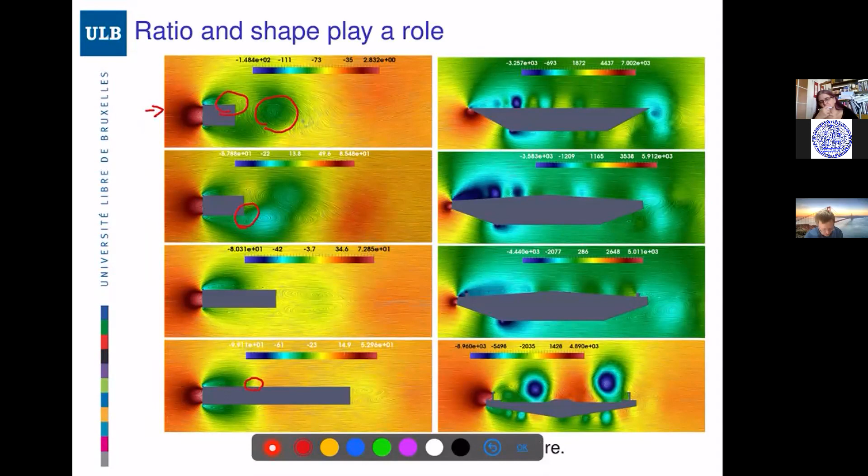Now, this is a CFD picture where you see a flow coming from the left and encountering an obstacle, and you see that at least two things count. The ratio: you see that the flow pattern here is quite different. If you have a long obstacle, then the vortices close before the end of the obstacle. So you have quite different patterns. So the ratio is important, and you also see that the shape is important.

This shape here is more like a realistic bridge. Of course, these are cross sections of bridges. If you have a wind guard here, this creates huge vortices, so this is not good for cars. But if you have a smaller obstacle on the plate or on the cross section, you create different flow patterns. So it's quite a difficult thing to study.

So I will totally simplify things, and my cross section will always be a rectangle. I'm not saying that I'm close to reality. I'm simplifying in order to be able to say something and study something from the mathematical point of view. Of course, engineers can do much more, but my point of view is mathematical. This is an experiment in a wind tunnel. You see that this is my simplified structure here.

So it's really a plate which is fixed on the two sides, right? And you have a flow coming from the left, a wind generated by the wind tunnel. And you see that you have many vortices created after the bridge, after the plate. So the obstacle, when the flow hits the obstacle, it generates a lot of vortices.

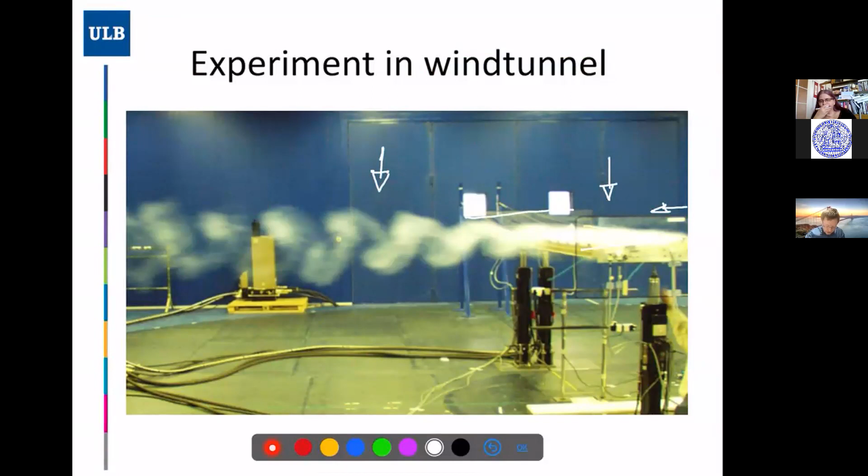So this is what is called vortex shedding, and I illustrated it like this. So in fact, this is a cylinder which can move only up and down, you have a wind coming from the left, and you see that this wind creates vortices, let's say, in a periodic way, and you see that it starts oscillation of the cylinder up and down.

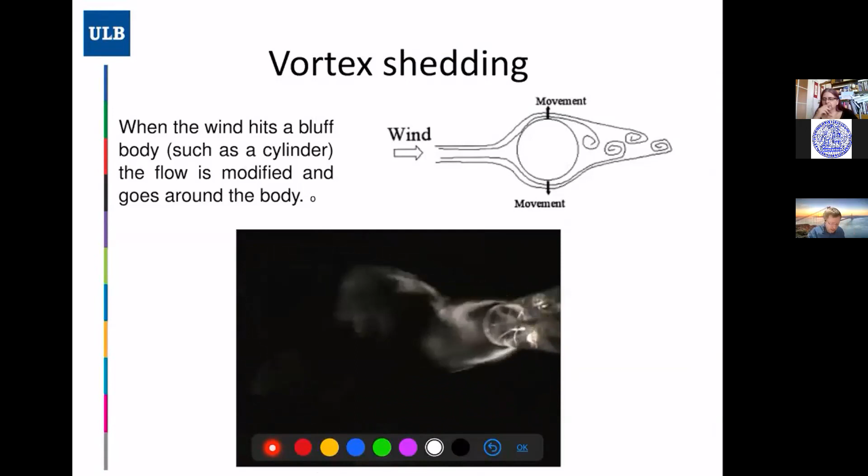So if I come back to this Tacoma bridge, remember that when the bridge collapsed, you had a strong up and down movement, and after some moment, the deck started to have torsion, and the torsion was a disaster that created the collapse. Now, what we suspect, and what is, I think, a good explanation of what happened, is that when you have a wind coming here, it will create up and down oscillation. So this is an excitation of the bridge by the wind.

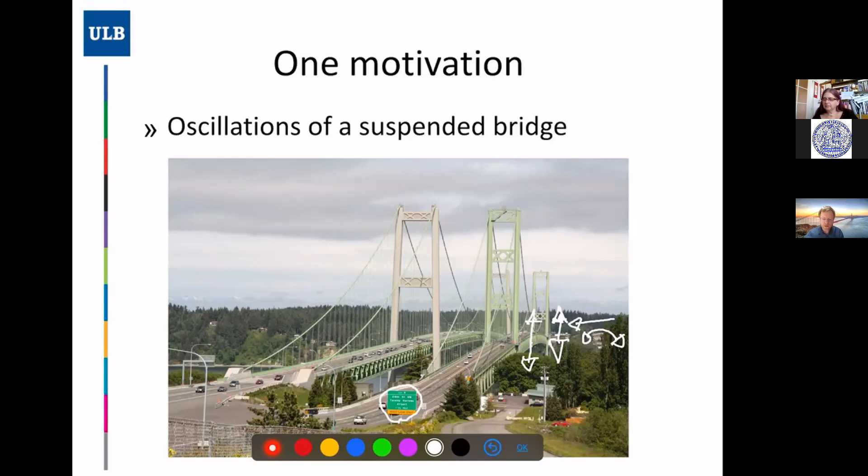And once you have energy entering the system, then you have several modes in the structure that can capture energy from up and down movement to torsional movement. And this torsion will be the devil, let's say, for the bridge. Okay.

So let me comment a little bit more on what is the mechanism that creates this up and down movement of the body in the vortex shedding phenomenon. This is again CFD, and you see that you have two shapes, and these shapes are symmetric. And in fact, let me just indicate that this is a picture with small Reynolds number. And you see that the pattern is totally symmetric.

So for the moment, forget about inflow, outflow. Of course, maybe it's not very physical. Maybe I have to go to an infinite cylinder and so on. But just assume that, okay, look at the symmetric. Of course, if the solution is totally symmetric, there is no lift. So lift is the force that the fluid would create to go like this, and there is no lift. Of course, there is drag. Drag is in this direction, but there is no lift.

Okay. Now, if you increase the Reynolds number, you see that you have a non-symmetric pattern. And assume again that I'm not discussing anything about the boundary condition, etc. So just do the reflection here and like this. If you have good conditions, no slip and good inflow outflow, let's say, you can flip the solution, and you will have another solution of your Navier-Stokes equation. Okay, so if there is non-symmetry, there is non-uniqueness.

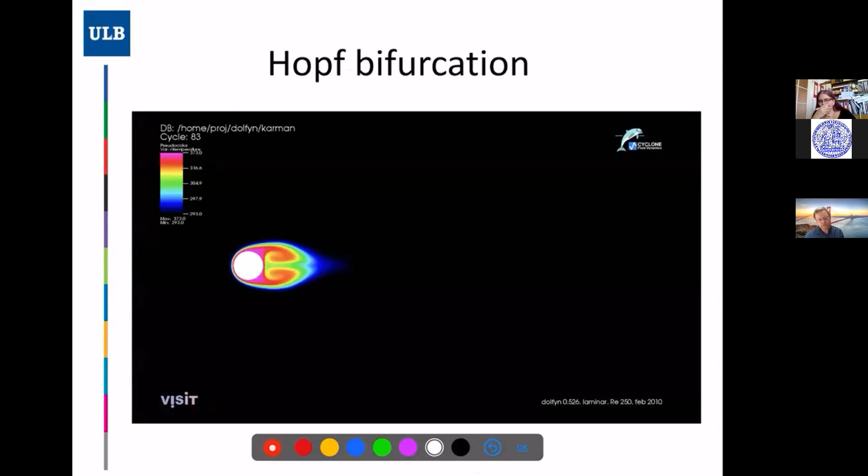And you have to be careful here, because numerically you can observe bifurcation, but what is interesting here is that there is a bifurcation which appears before the bifurcation of steady state to steady state, from symmetric state to non-symmetric state. And this is now a time-dependent solution. And in fact, when you see this time-dependent solution, you have the feeling that this solution is going to converge to a steady state. It seems like that.

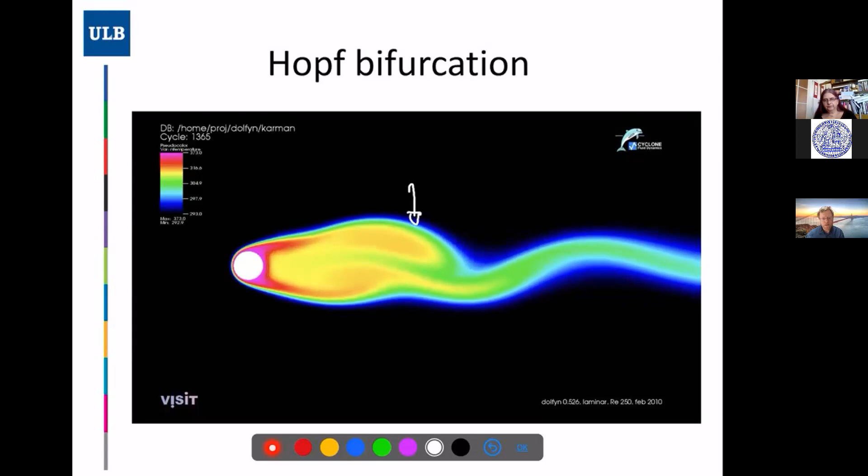And then you will see that at some moment, the solution will start to be non-symmetric. And maybe you have seen this kind of video before. So you see that the solution is not symmetric here. It becomes non-symmetric, and then it starts. And then you see that what is called a Karman vortex street is created.

And in fact, this is what is called a Hopf bifurcation, because you bifurcate from a steady state to a periodic state. And it's interesting that in 2D, when you look at a flow past a cylinder, the Hopf bifurcation appears before the bifurcation of steady states. And by the way, there is a marvelous paper by Paolo Galdi about the functional setting of this Hopf bifurcation. Okay, so what would be a dream?

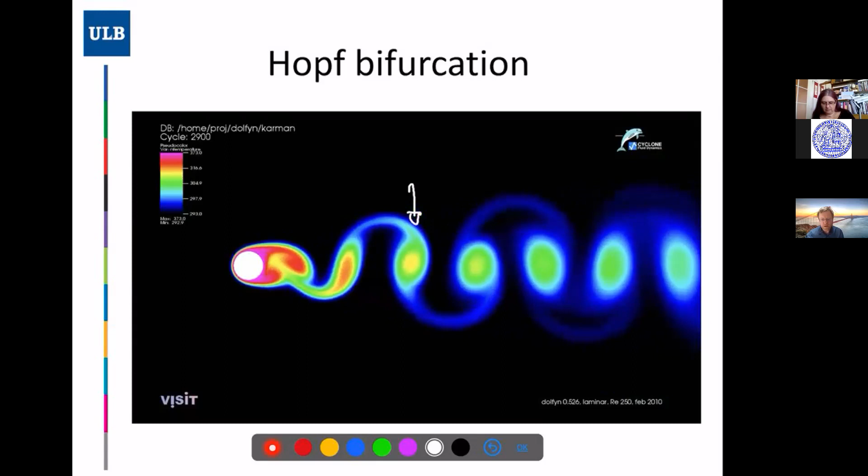A dream would be that we can show, or I would dream, excited by a wind, it starts to oscillate up and down, and periodic movement, maybe twist movement of the bridge, of the plate.

Okay, so let me discuss about modeling. Yeah. So in your previous graph, I always thinking about steady state, and you increase the Reynolds number. Yeah. Okay, and like when Reynolds number is small, you have symmetric solution. When the shape is symmetric, and when you increase the Reynolds number, then somehow it becomes non-symmetric. Yeah. Right? Okay. Thank you. Yeah, that's it.

Okay, so let me discuss the modeling. So there are at least 3 levels of modeling. One is to study the structure. And when you want to study the structure, somehow you assume how the aerodynamic forces act on the plate.

So, for instance, I will show you two ways to introduce aerodynamic forces on a plate equation, but somehow there is a limitation of this model because the way you assume the wind is acting on the plate is empirical. It doesn't really come from a theory. It's not really totally physical.

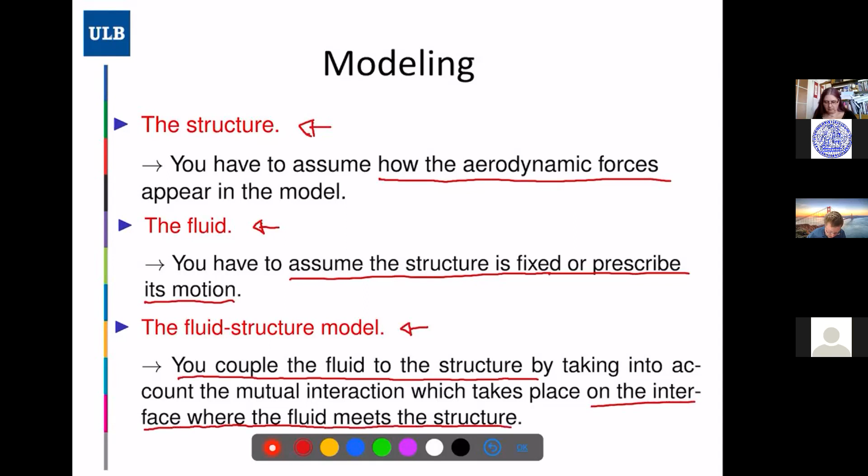So you take into account that your plate is going to move because of the presence of the fluid. And when the plate starts to move, of course, the fluid reacts. And also, let's say the solution of the Navier-Stokes governing equation is going to change, okay? So it means that you have to take into account the forces that appear on the interface where the fluid meets the structure, okay?

So I will discuss the modeling of the structure I did in two different papers. One with Dos Santos from Brazil and Gazzola from Milano. And another one again with Gazzola and Lasiecka and Webster from the United States. So in the first one, we somehow study the structure. I will show you the equation.

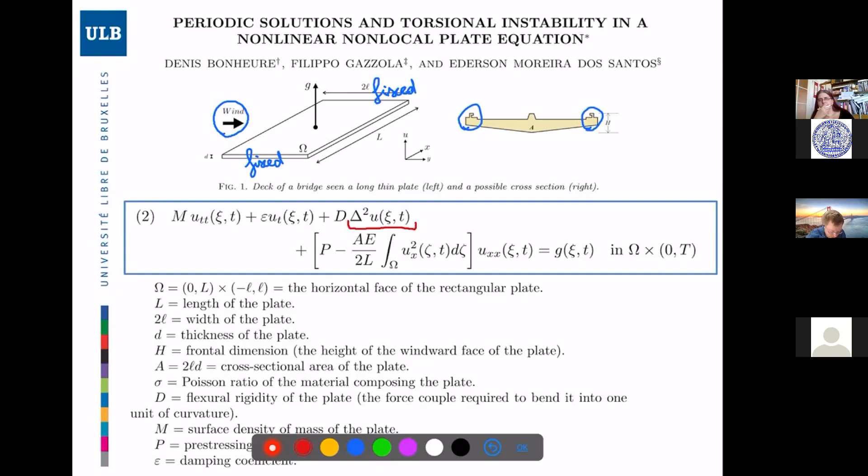You see that the nature of the equation is more or less hyperbolic, even though it's degenerately hyperbolic because you have fourth order and not second order. And then you see that you have this non-local term.

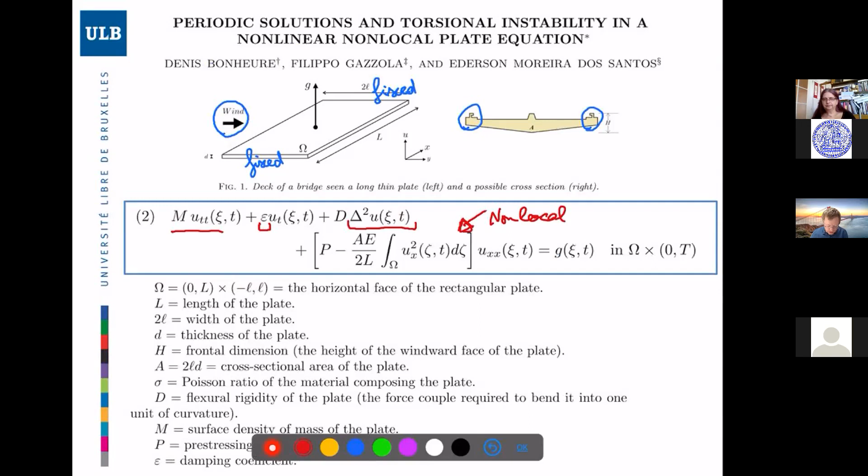If you want, you can read all the physical constants that appear in the model. Okay, so the way we handle the aerodynamic forces: in the first paper we used a periodic forcing term which was proposed by some engineers. When you say you have something periodic, the first thing to write down is, let's say, a sine or a cosine. So this is not really important.

The important thing is that the frequency is governed by a law which is linear in the wind velocity, while the intensity is quadratic with respect to the wind velocity. And this is again empirical. There is no real physical explanation of this.

Okay, so that's a way you can model the vortex shedding, but it has a limitation because you see that this force is totally given and depends only on the wind. It does not depend on the way the bridge moves, on the way the plate moves.

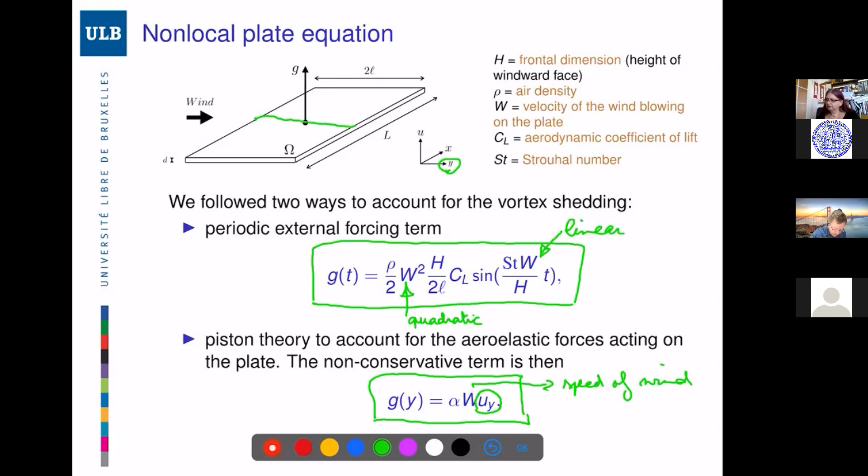Now another attempt that we made is with this kind of non-conservative term, and you see that again this W is the speed of the wind, but you have now this u_y, the derivative of u with respect to y. So somehow the way the bridge or the plate is forced depends on the movement of the plate, on the deflection itself, in the transversal direction. Remember that y is this direction here, right?

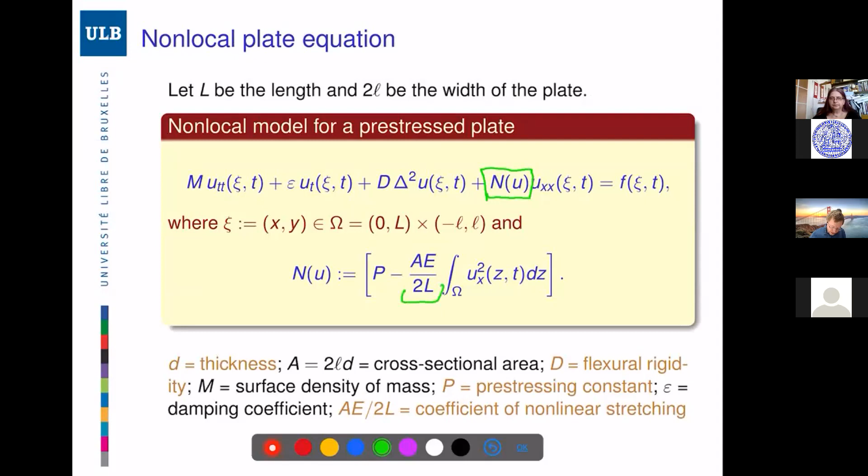Let me show you, this is again the model, just to emphasize that you have this non-local term here that multiplies u_xx. In this non-local term there is what is called the nonlinear stretching here and the pre-stressing here. Now pre-stressing means that you can have a totally flat bridge, like this, or a pre-stressed one, like this. And you see that this one is a little bit more pre-stressed.

You cannot pre-stress a bridge too much because if you put too much energy, then your bridge, your plate, is not going to react in a good way. So this is, let's say, equilibrium 0, and this is a shape which is like the first eigenfunction of the problem. It's very close to a sine, and it is a sine, in fact. If you put too much energy when you pre-stress the plate, then your plate is going to look like that, and that's not what you want.

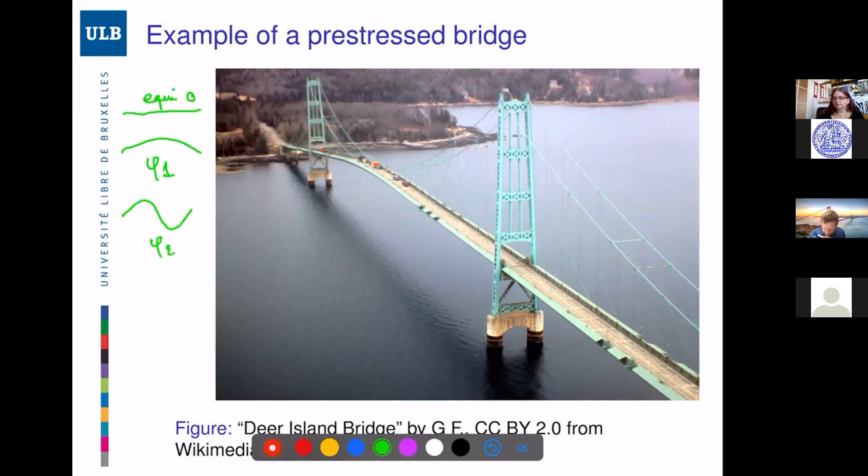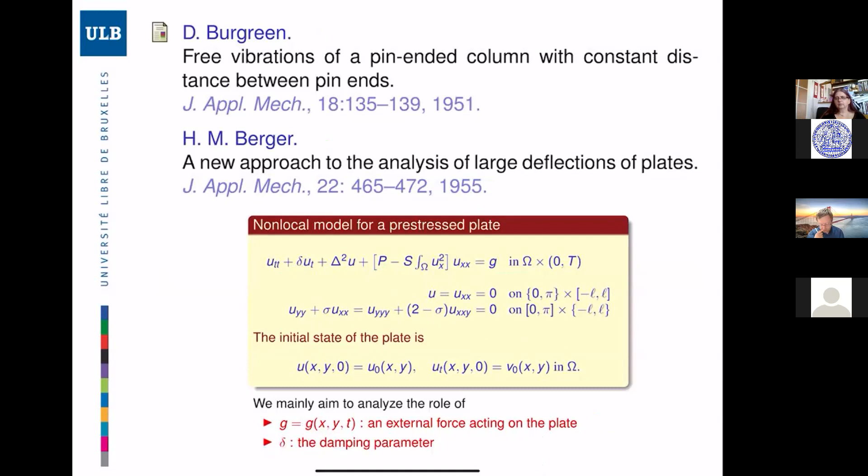Imagine that you want your plate to resist an external force which has a prescribed bound for its intensity. You want to know how much you have to damp your structure to resist this external force.

Okay, so now let me discuss the boundary condition. As I said, on the small edges, u and u_xx are 0; in fact, this is a natural boundary condition. And then on the large edges, you have a quite strange boundary condition, which involves u_yy, u_xx, but also u_yyy and u_xxy. This sigma I will not discuss. It's the Poisson ratio of the plate.

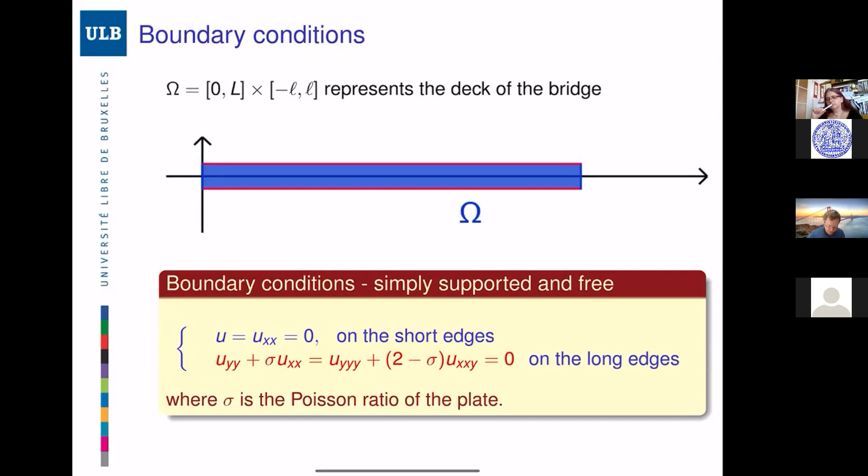It's related to whether the material is shrinking or enlarging when you compress or stretch it. It's a positive constant. Well, it could be negative in some cases; there are some foams which have a negative Poisson ratio. Okay, now let me discuss this.

In a very simplified model of the plate, the energy of the plate, depending on the deflection, is quadratic with respect to the principal curvatures of the plate. And you have here a term which is sigma K1 K2, the product of the principal curvatures. Now, if you have small deformation, this sum of squares can be approximated by the Laplacian of u squared, and the product of the curvatures is approximately the determinant of the Hessian.

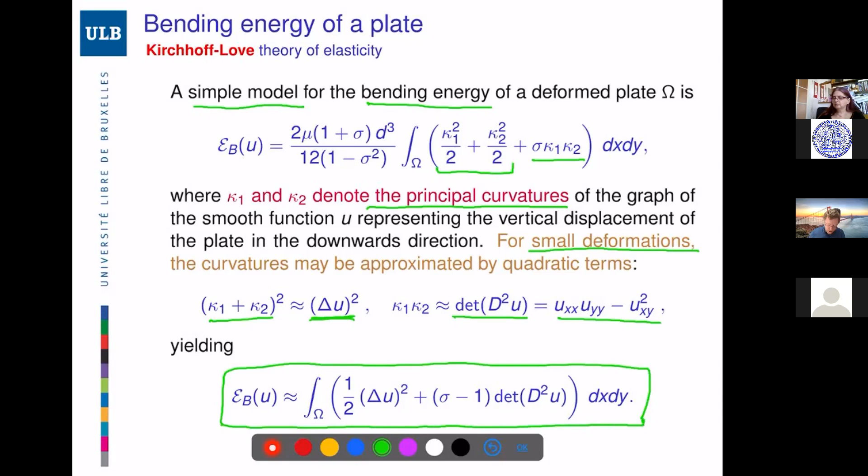This is what people call Kirchhoff-Love theory, and so you have this energy, which is a nice approximation of the bending energy of a plate. Now you see why my boundary conditions are what they are. It is because I'm taking the Sobolev space of functions which are 0 on the small edges, and only that. And then I take my inner product to be dictated by the form of the bending energy. So I put indeed sigma minus 1 times the bilinear form which gives the determinant of the Hessian when you take u with u.

And so this boundary condition, sorry. This boundary condition. These are the boundary conditions that appear when you go from weak formulation to strong formulation of your solution.

Okay. So again, as usual, weak solution is understood in the classical sense. I mean, this is a classical definition of solution. So, for instance, we ask that U is continuous in my space H2 star, C1 in L2, and C2 in the dual space of H2 star. And this is because you want this to be defined, you want this to be defined, and you want this to be defined. Okay, and that's it.

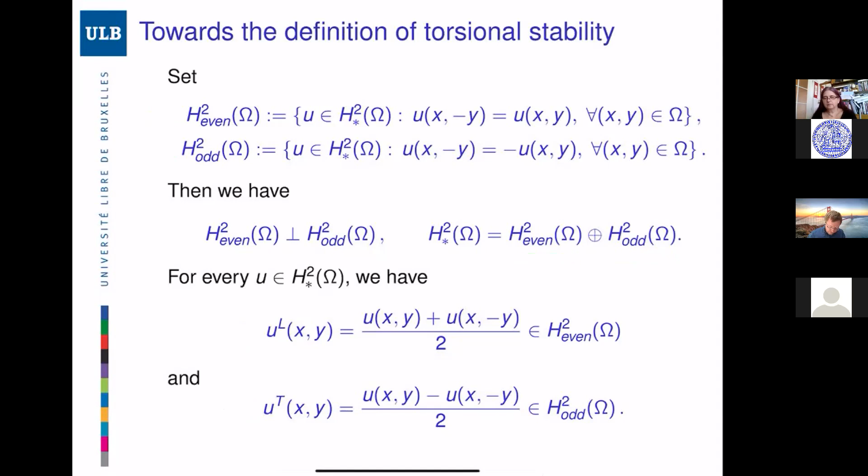What can we say about this? That was the question I told you about. Assume that your external force is bounded, so you know explicitly a bound on this external force. So in application, it could be you know that you are in a region where the velocity of the wind is never above a certain threshold. And then you can prove that there exists a damping delta zero, which is enough.

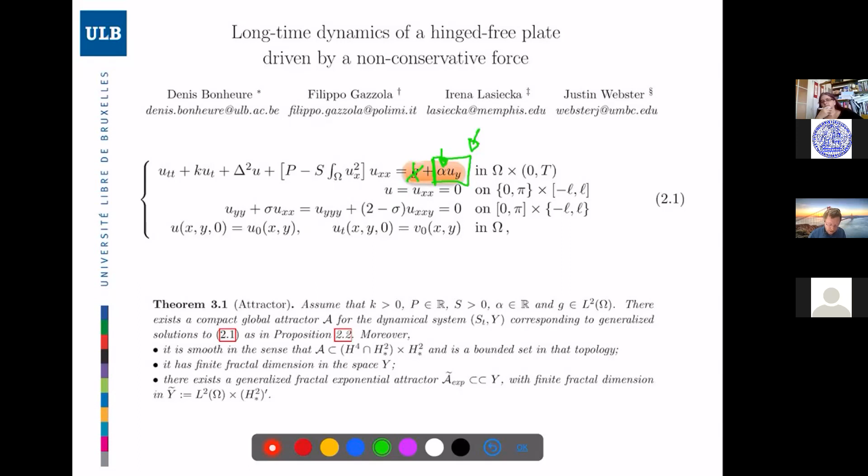And we have something much more interesting, I think. We were able to show that if alpha is big, in fact, we can prove existence of stationary solutions which are not the equilibrium solution. So somehow it means that if alpha is big, and this alpha is an aerodynamic coefficient, it depends on some physical engineering way of taking into account the non-conservative force. If this alpha is too big, in fact, the model has more than 0 as steady solution.

So, we have many steady solutions. And this means that somehow the plate can be in equilibrium in a different position than the 0 position. Okay.

So we look only at the cross section of the plates, and we have a wind or a flow coming from the left. And we want to understand if this flow creates movement up and down, but also we want to understand if this starts torsional movement. Okay, so that's what I show here. This is the up and down. And this is rotation of the plate. Here I put the cables just to illustrate things, but I'm not taking cables into account.

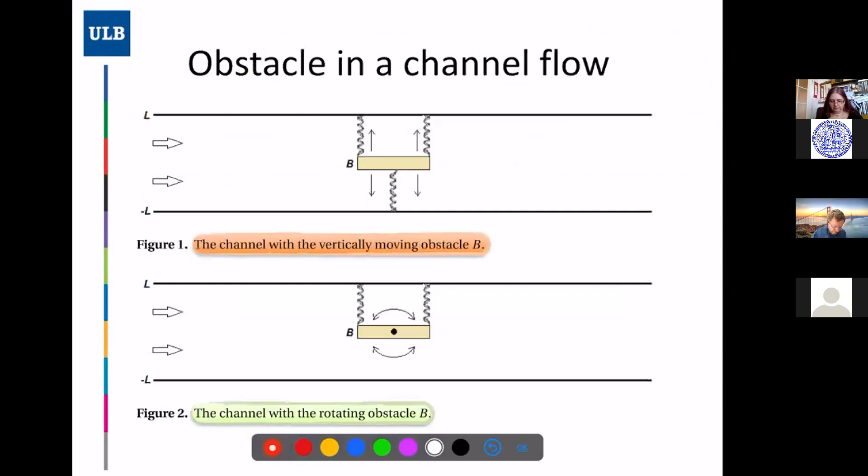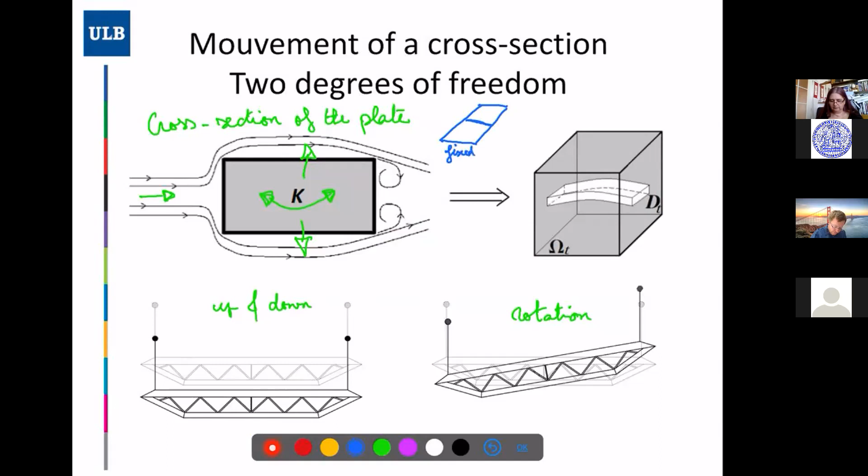if we think about the fact that this is a cross section, my full plate is like that, and somehow a cross section cannot have wild oscillation. It's not totally free to move because of the plate, which is fixed here. So there is kind of a restoring force that we assume to be a nonlinear restoring force. Okay, so that's again the problem.

And what do we assume moreover on the restoring force? We assume a strong force condition. So of course we assume that the force is acting when the cross section is above the zero position. The restoring force is recalling it to the origin, and the same when it's below. And we put an extra assumption: the force satisfies a strong force condition when the cross section is too close to the wall of the channel. In fact, this strong force is there to prevent collision.

So that's what we want to study. We want to study equilibrium positions. So it will not depend on T. H dot is going to be 0, and H double dot is going to be 0. So if we want to study steady solutions, steady fluid structure solutions, what we have is the Navier-Stokes equation, Poiseuille at minus infinity and plus infinity in the x1 direction, and no-slip condition on the obstacle and on the wall of the channel.

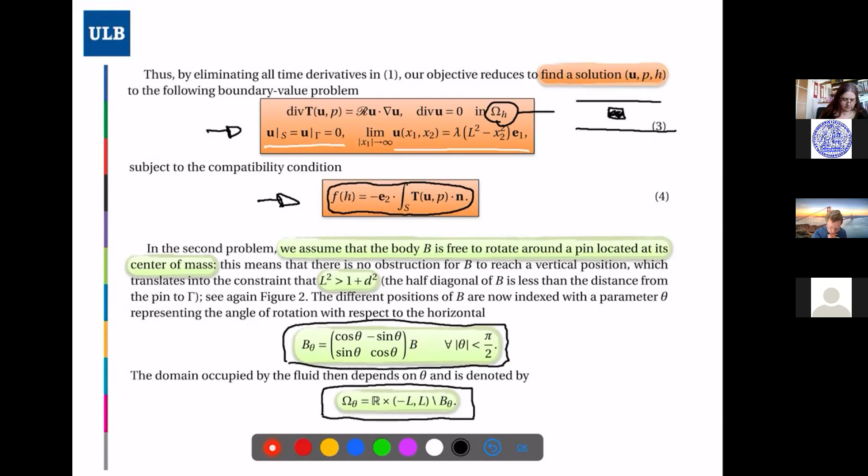Yeah, okay. So let me discuss the second problem where the body is rotating in the channel. Of course, now the fluid domain is a little bit different. It's the channel still minus the body, but now this body is rotating around a fixed pin. Okay, so it's rotating around the center of mass, and you have a very similar problem still with the Poiseuille flow. Again, the Navier-Stokes equation, but a change in the dynamic condition at the interface.

And of course, now what you have in the third equation is a kind of pendulum equation with a non-linear restoring force. And this is what is called a torque. This one is a torque. So just telling you that the body prefers to be horizontal, and when it's rotating, then there is a restoring force. Okay, so what do we assume? We assume that this restoring force is odd, its derivative is positive, and we don't have to assume any strong force. It's a weak force condition. So just that when the obstacle is not horizontal but vertical, the recalling force is infinite.

Okay, and so the problem to study is again the equilibrium position of the body in the channel. And so what you see is that you have this Navier-Stokes condition and no slip boundary condition. Okay. Okay, so what is the result? In both cases, what we were able to show is that when the Reynolds number is small and when the intensity of the Poiseuille flow is small, then there is uniqueness of the equilibrium position, which is obvious, let's say, from the physical point of view. And physicists or some engineers will start to laugh because, yeah, of course, this is true, but prove it with mathematical rigor. That's a different story.

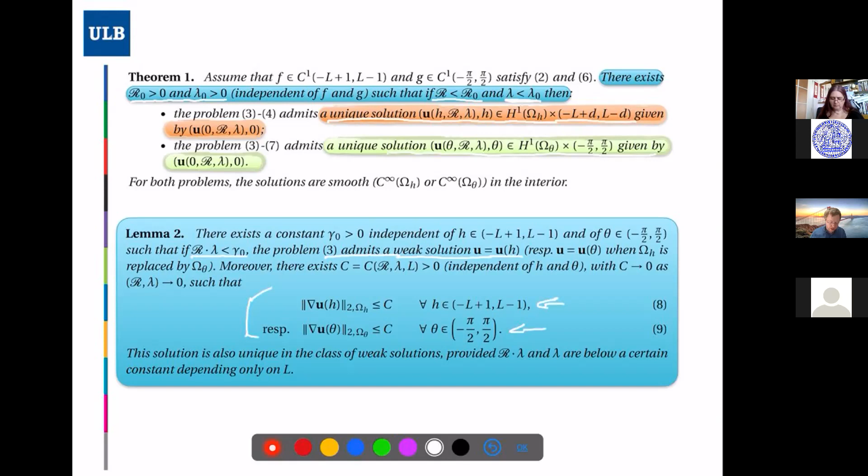And moreover, what you have is that you have uniform bounds. Okay. So the gradient of U in the fluid domain will be bounded in a good topology. Of course, this depends on the position up and down, and this depends on the angular position. Okay. Now I have to discuss differently the case where the obstacle is going up and down, and this is because in this case there is an additional difficulty, and let me explain this.

So in fact, to identify this lift, this is the lift in fact. So to identify the lift acting on the obstacle, the trick, which is not new, it's known for many years, is to introduce some auxiliary fields. Okay, and take the condition on the boundary of the obstacle. So we introduce this auxiliary flow, and this creeping flow is not so good. Why? Because you see that it's zero on the boundary of the channel, but it's equal to E2 on the obstacle.

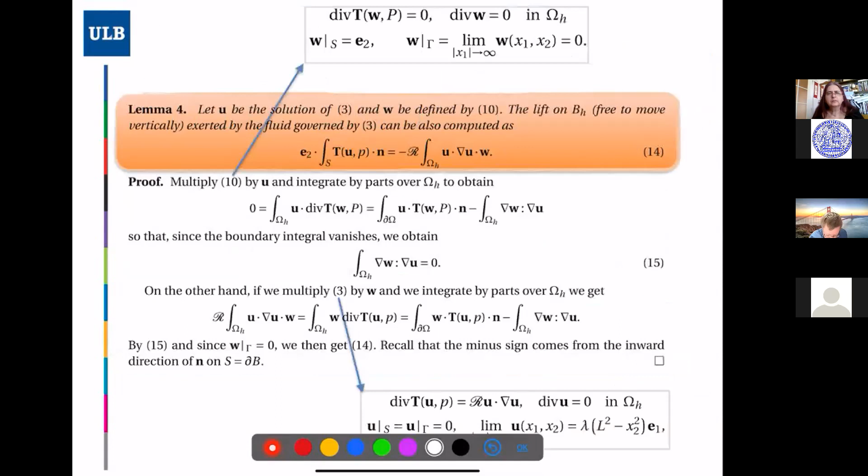Sorry? Like, what is epsilon here? This epsilon, sorry, it's the distance from the wall. Okay, thank you. So when the obstacle is too close to the wall, there is a boundary layer, because your derivative jumps from E2 to 0 on the wall. And that's the quantification of this boundary layer.

Now, if you multiply the Stokes equation by the solution of Navier-Stokes, and the other way around, the equation of Navier-Stokes by the creeping flow, the auxiliary flow I introduced, you end up with this solid integral, where you see that the Reynolds number appears. You have the solution of Navier-Stokes and the auxiliary flow, W. This is very good information because it shows you that Stokes tells you that there is no lift.